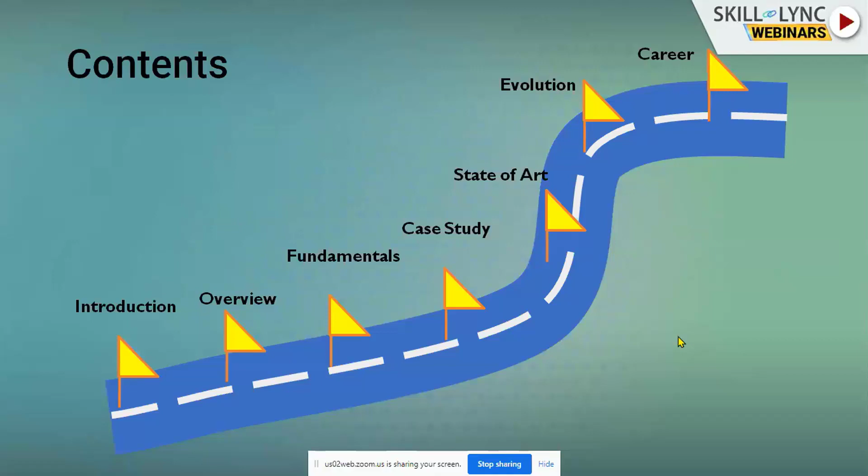And after that, I'll give a brief idea on the evolution of liquid retaining structures from the earlier days, how they have evolved into the present-day situation. And last but not least, what are the career prospects, which is a very important aspect for this kind of designing. If one can gain the capabilities through proper understanding and make themselves competent in the design of liquid retaining structures, how their career will move forward, what are the opportunities, what new things they can learn, and their job profile. I'll be discussing this career field.

In the introduction part, we can discuss that today is a period of rapid urbanization, which we can observe in many countries, especially in our Indian context as well. In this context, lots of smart cities, town upgradations and locality upgradations are coming up. Lots of new municipalities and corporations have been formed. So with these new changes in society, a centralized water treatment system is mandatory to cater to the water needs as well as effluent needs for the smart cities and new urban cities.

So centralized water treatment is a water treatment plant where raw water, sometimes from surface water, sometimes groundwater, is pulled up, treated and stored in liquid retaining structures, and from there, by proper means, it flows to the nearby cities or towns where people can get treated water. So in the water treatment plant aspect, the liquid retaining structure is a very important structure, which is a major part of water treatment.

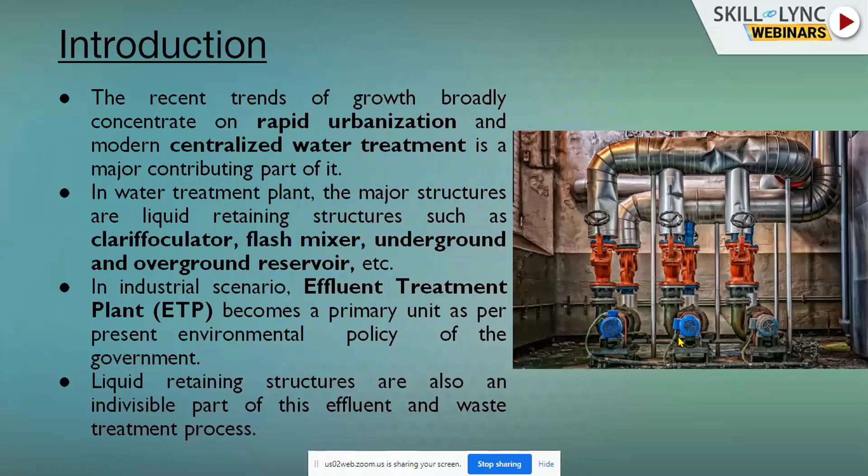The following aspects of liquid retaining structures are to be learned by every practicing engineer who will be making their career in this domain. First of all, they need to understand the importance. I have already discussed some of the important aspects in the introduction slide. After that, people have to understand the sizing calculation, because it is very important how the sizing calculation is made.

Suppose for an overhead tank, what will be the capacity of the overhead tank? That is a very crucial thing to decide. That depends upon the maximum daily demand and the average daily demand of a city, which is calculated based on rational formulas available in codes as well as textbooks. From that demand, the size of overhead tanks is calculated. Also, in some areas, fire demand is a major thing that needs to be taken care of in these overhead tanks. So the sizing aspect is very important for the overhead tank.

Also, in sedimentation ponds, the sewage, or the raw water to be treated into purified water, is mixed with coagulants and then passes through a long bed of sedimentation pond, where the pond length and width are calculated depending on the settling velocity of the particle. So from the settling velocity aspect, the size of the pond is calculated. So the sizing calculation is very important.

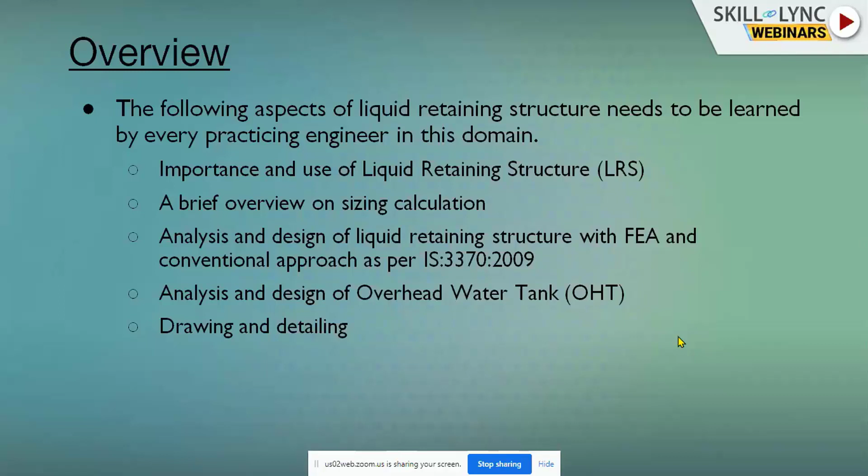Now I am pointing out the design and analysis phenomena of this LRS system, which is actually followed. To understand the design and analysis of LRS, that is liquid retaining structure, first of all one has to understand the behavior of the structure under different loading conditions. That is very important for a practicing engineer to consider.

On the right hand side, you can follow in figure 1 the clarifier, which is used to treat raw water. The raw water is pumped through intake channels or intake pumps from surface water, that is from a river, or it can be a huge natural reservoir. From that reservoir, the water is taken or pumped, and it is mixed with coagulants.

After the flash mixer, the water is stored in this clarifier, where some agitators are continuously moving at a very slow speed so that it is mixed properly with the coagulant, and the sediment and solids precipitate in this tank, and the clear water is transferred to the peripheral clear water channel. From there, it is taken to the further treatment process.

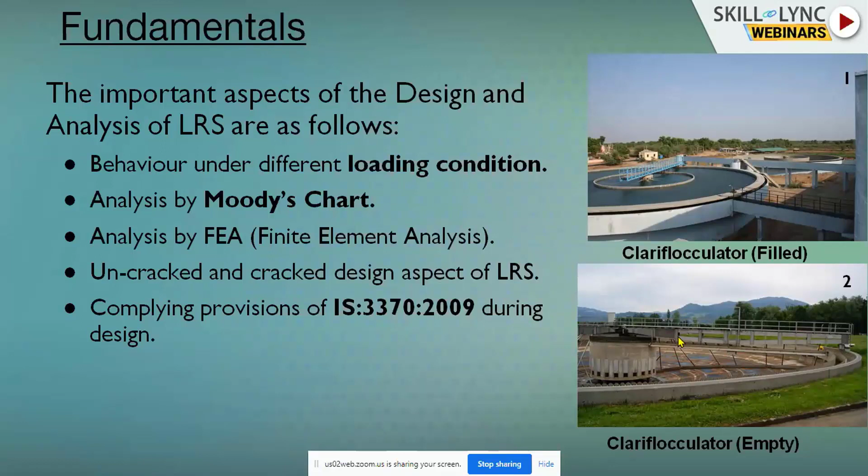Another thing is IS 3370:2009, the liquid retaining structure design code. We have to comply with all the provisions mentioned in this code during the design process. The stress levels are mentioned there, and the crack width calculation system is mentioned there. So one needs to comply with all the provisions of IS 3370 during the design process.

Since I discussed Moody's chart in the earlier slide, here are a few snaps I have taken from Moody's chart. Mr. W.T. Moody, in his water resources technical publication, provided boundary conditions as well as loading conditions. Different boundary conditions can be seen at the top: top free, top hinged, three edges fixed, and so on. These four or five boundary conditions are there, and at the bottom are the different loading conditions, that is, the pressure ordinates on the wall elements. Based on these loading conditions, several charts have been developed in this technical publication.

The rectangular part is used for surcharge calculation where there is surcharge load, and the triangular portion is important for our liquid retaining structure design. This triangular pressure is calculated for the wall. So with these boundary conditions above and the loading conditions below, the moment and shear values are calculated.

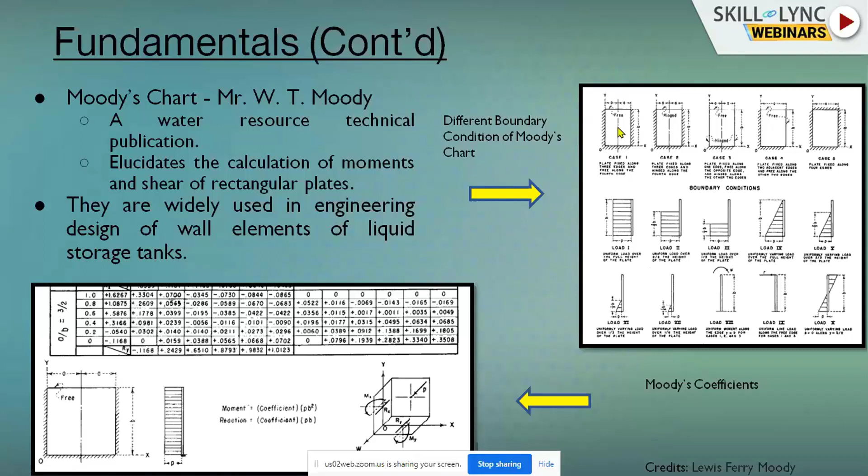On the right hand side, one can follow the sign convention used for calculating moment and shear, which is very crucial to understand. Through the sign convention, it is possible to identify which is the tension face and which is the compression face. For a three-edge fixed tank, if the pressure comes from the outside, at the fixed wall junction there will be tension on the outside, but in the middle portion the tension will be on the inside. So it is very important to take the positive and negative aspects into account, so that we can properly calculate the moment and shear values and provide effective reinforcement on the required side.

Crack width calculation is important since, as discussed earlier, uncracked design of liquid retaining structures is not very popular, because it restricts the concrete and steel stresses to a considerable extent. The wall and raft thicknesses become very high, making the structure very costly and uneconomical. So nowadays cracked section calculation for LRS is very common. In this process, we calculate the crack width on the tension face.

In the tension face of the wall or raft, by the following formula. This formula is already available in IS 456 2000. Also in IS 3370, these formulas are given. So based on these formulas, we are able to calculate the surface crack width in the tension face.

So this is restricted to 0.2 mm as per IS 3370 2009. So if with the moment value we can restrict our surface crack within a value of 0.2 millimeter, now the code says that that is allowable, and in this way the structures are made more economical nowadays, and it is very feasible too.

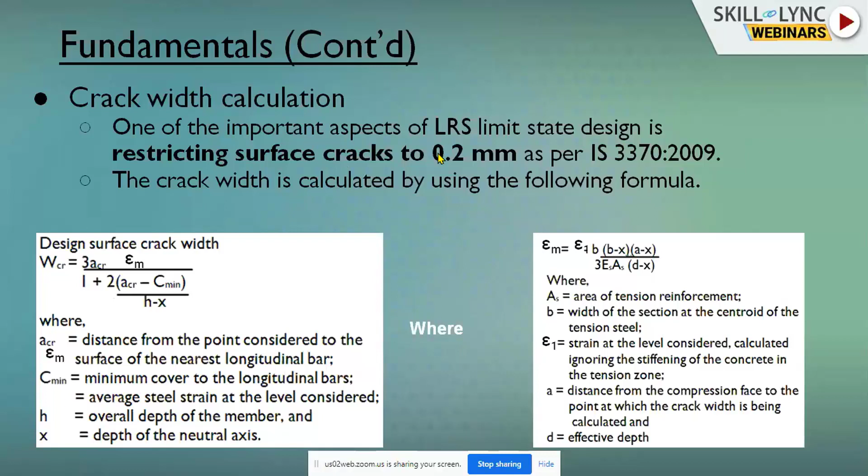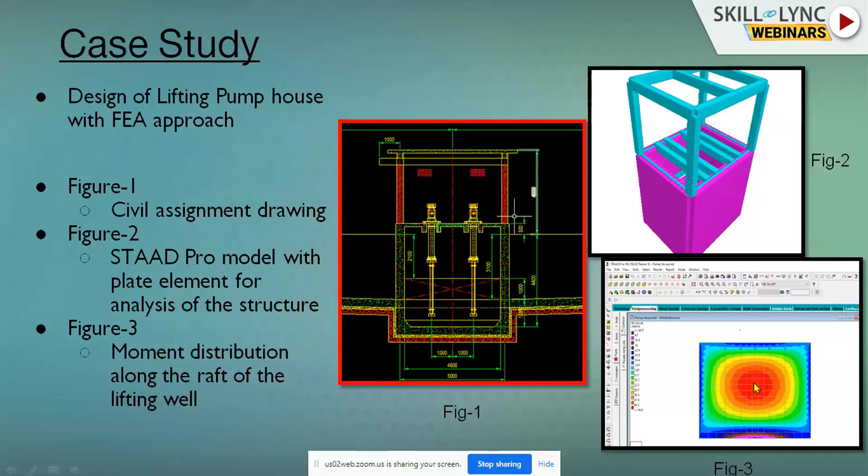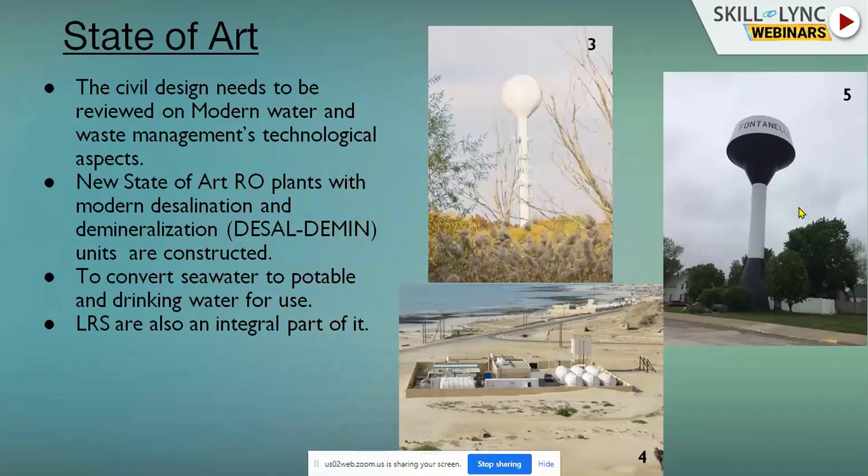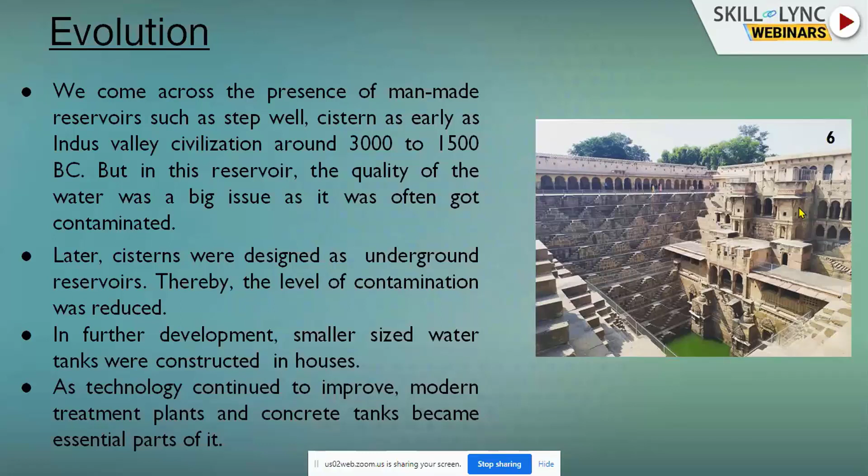Coming to the career prospect, as per the National Water Mission, promotion of water purification and desalination is one of the prime goals of the government. Since the Government of India is putting more importance into this field, the demand for engineers, especially civil engineers, in the structural design of liquid retaining structures as well as water treatment plant design is very, very high. Since there is a lack of knowledgeable professionals in this field, there is a huge opportunity in the field of water and wastewater systems.

Especially, companies are looking for experienced design professionals who are very conversant with liquid retaining structure design and its aspects. Also, for freshers just passing out from college, the new companies emphasizing their business model on the water and wastewater segment are looking for basic knowledge in the design field of wastewater, water treatment and effluent treatment sector.